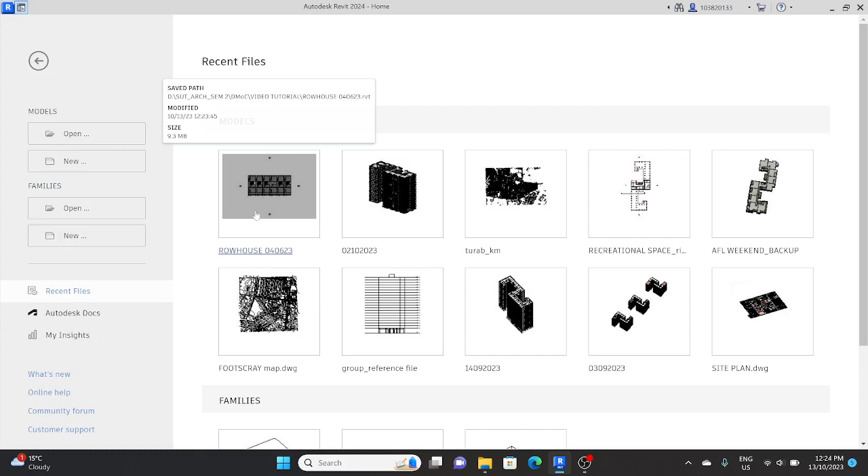To begin with, we need to open Revit and load one of our projects. You can do it here, as I already have this project open. Now in this project we need to go to 3D view, and as you can see, most of our site has already been developed.

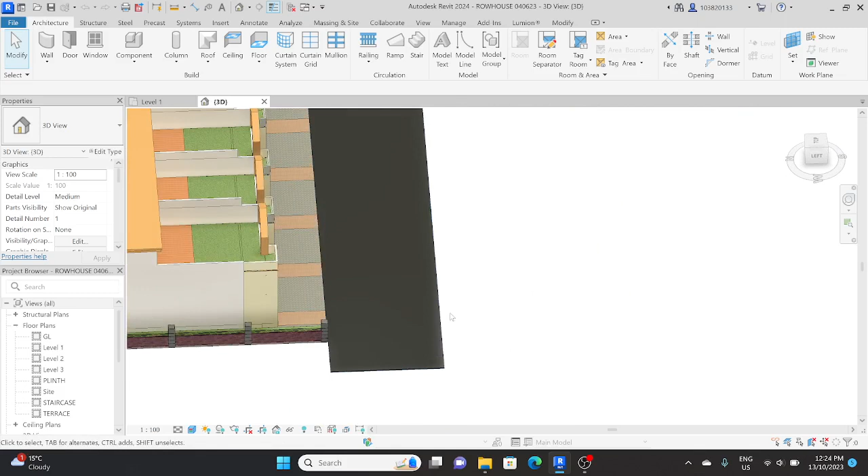Right now, if I want to develop a few more things, for example I need to add a footpath over here, I'll show all the aspects of site development in Revit. So I'll be hiding this element for now.

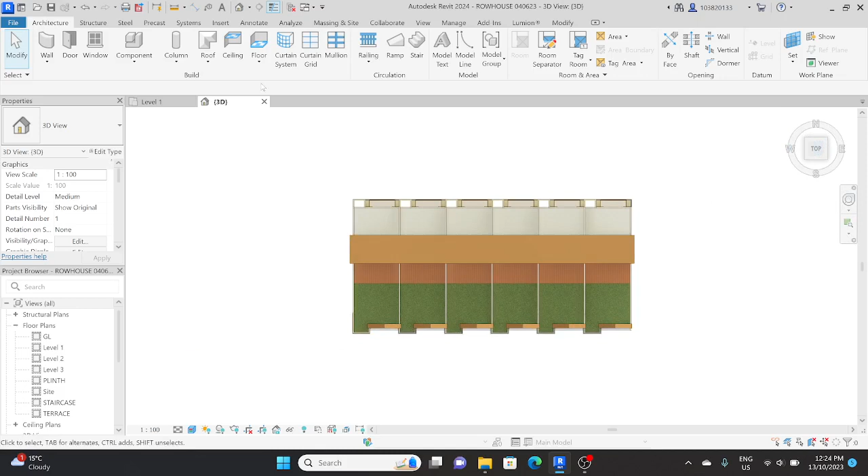To begin with, we will first set our work plane to the ground level, and later in components we would go to model in place.

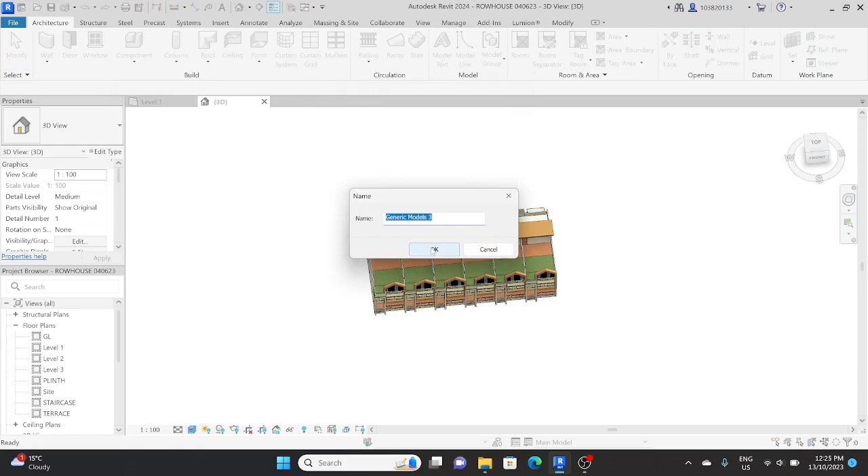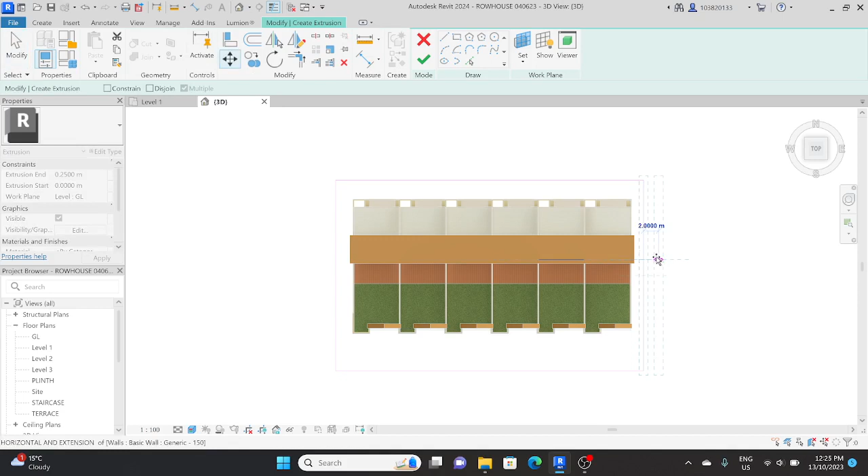There is something called generic mass extrusion, and you can simply make a plane somewhat like this, having it slightly far away from this tentatively. Once we press OK, it will have some depth, so we'll give it a minus 0.10 depth, and as you can see, this sits below the ground floor.

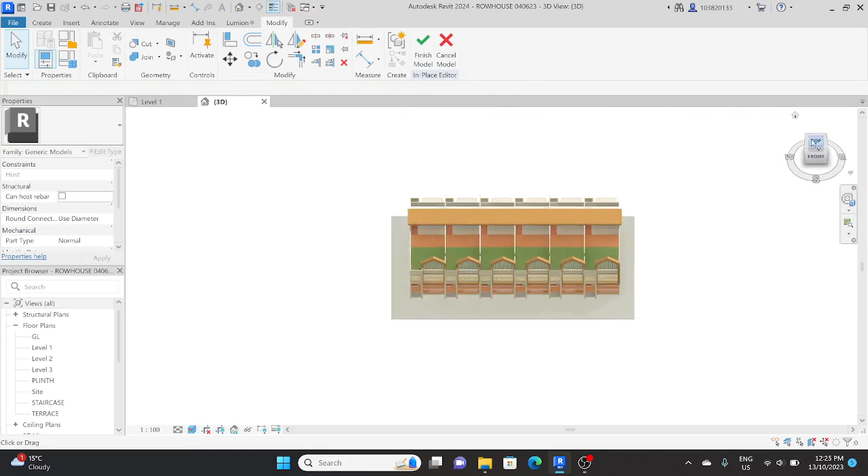Now we'll be assigning a material to this plane. For that, you need to go to material over here, and you can assign your own material, so you need to create one.

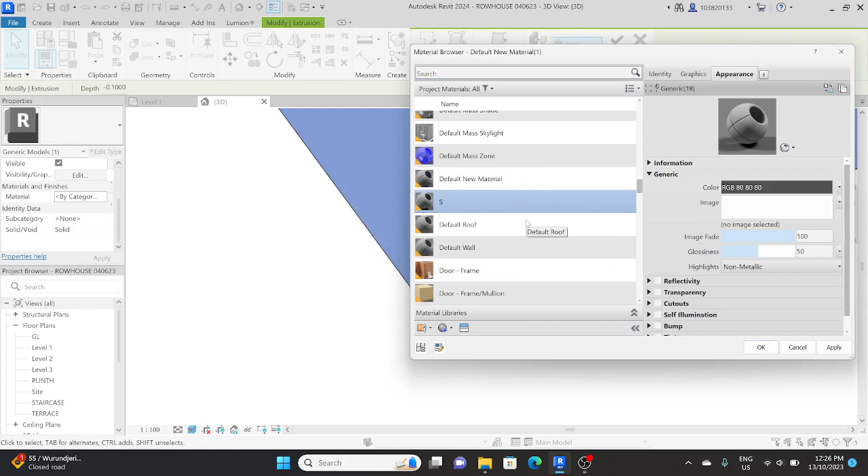I have duplicated my material. I'll rename it, for example with my name's initials, and call it Road Site 1, Site 01.

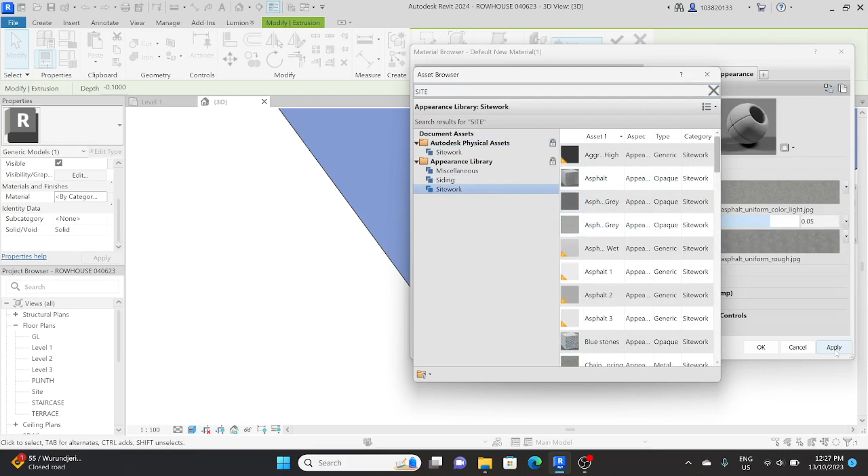I'll go and assign a few materials, like site work. You can assign any of these materials simply by clicking on this icon and applying OK. As you can see, the material has been applied.

Similarly, to create a boundary wall, you can use various tools, similar to how we use tools in SketchUp. There are plenty of tools available; for example, with sweep, you can simply click on the edges of this portion.

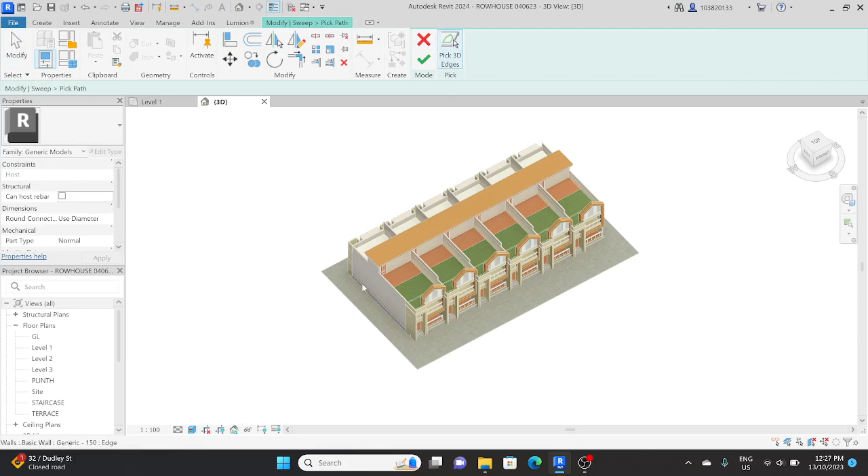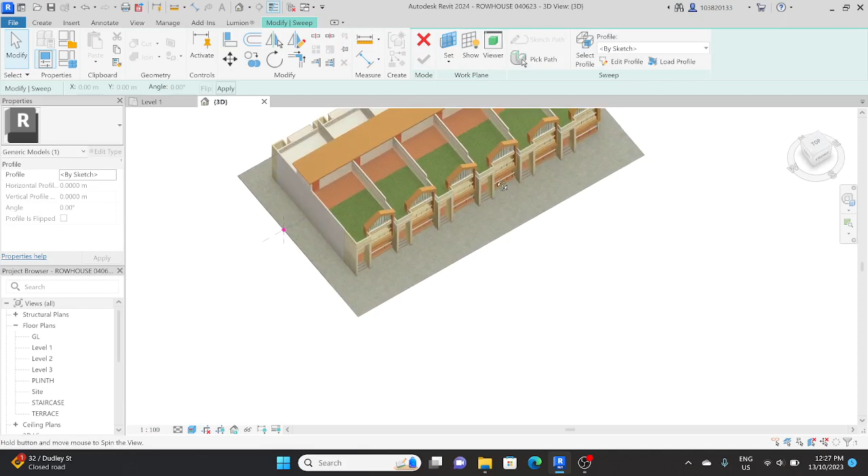You can align these edges over here tentatively, and select OK. By doing this, you get a profile to draw on this plane.

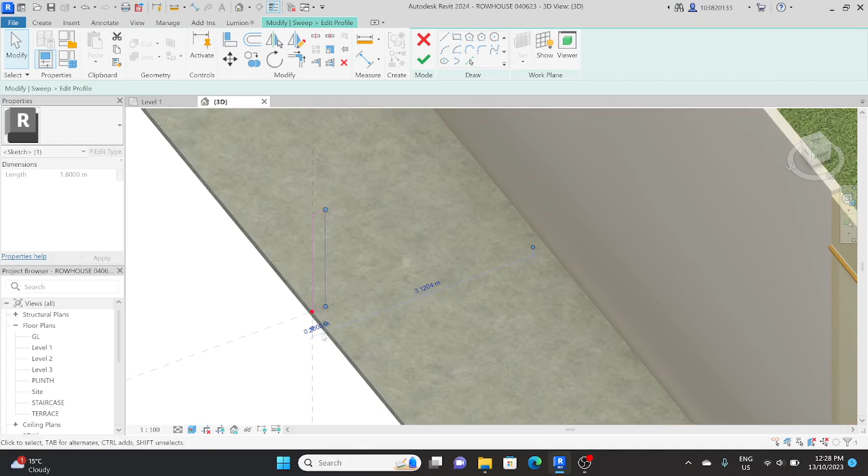Once you draw your profile on this plane, like a boundary wall, it would have a height of roughly 1.80 meters, and thickness of 0.23, which I'll consider. As you can see, my compound wall has been done.

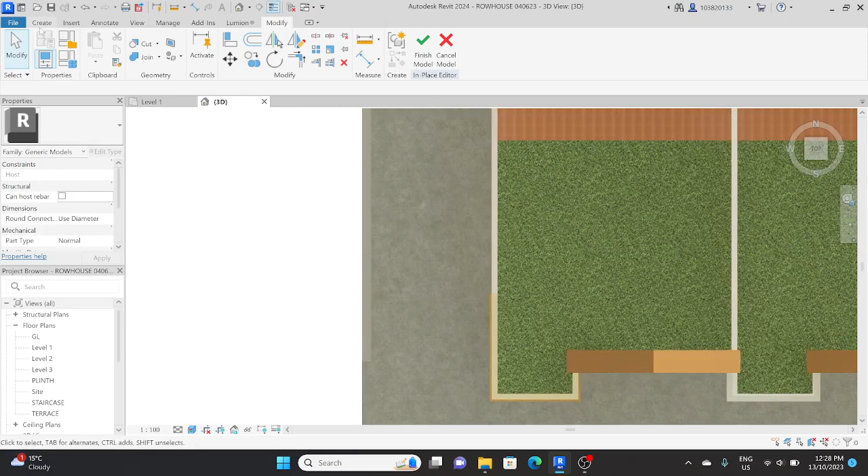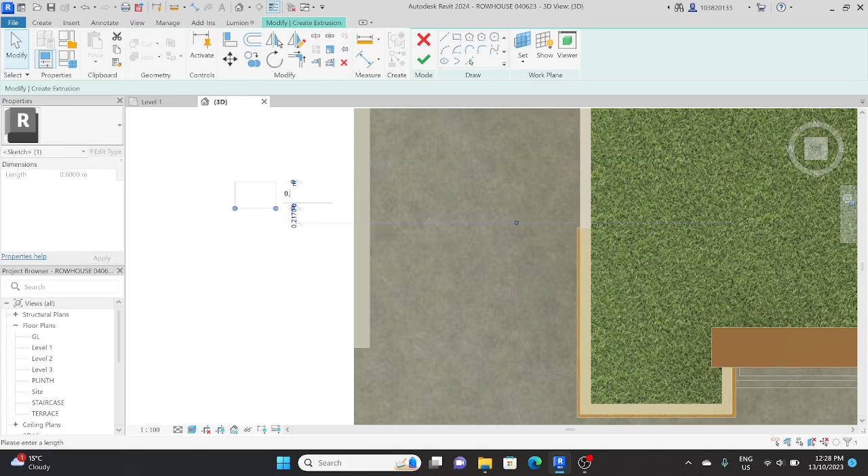Similarly, we can further detail out this compound wall by adding posts. In the form of extrusion, we can add some posts, about 0.6 meters by 0.60 meters, and place them roughly on these edges.

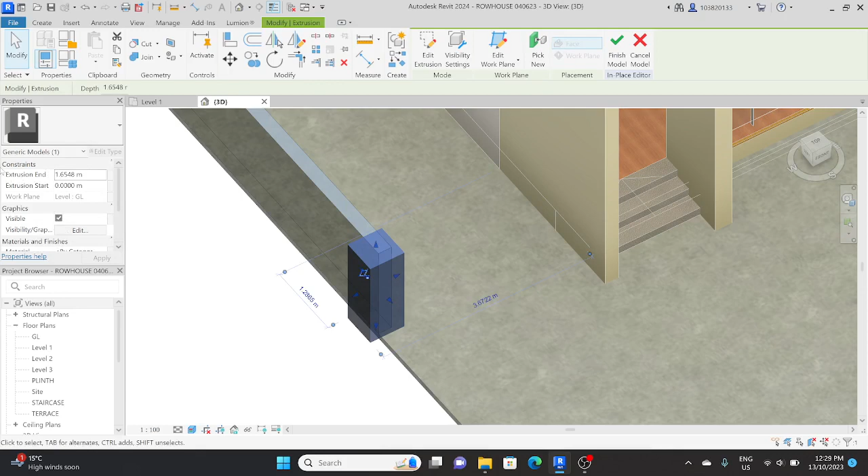Once your posts are ready, you just need to extrude this, or give it a particular height by going on extrusion end, giving it a height of say 2.10 meters. This could be slightly taller.

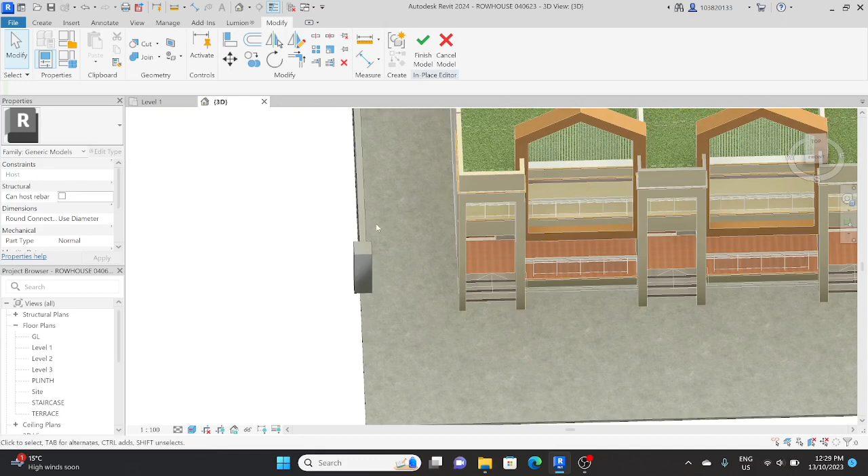Now I'll be further detailing out this post. To do so, I would create another extrusion, set surface, pick a plane, and I'll select this face, the topmost face, and now I can draw a few offsets.

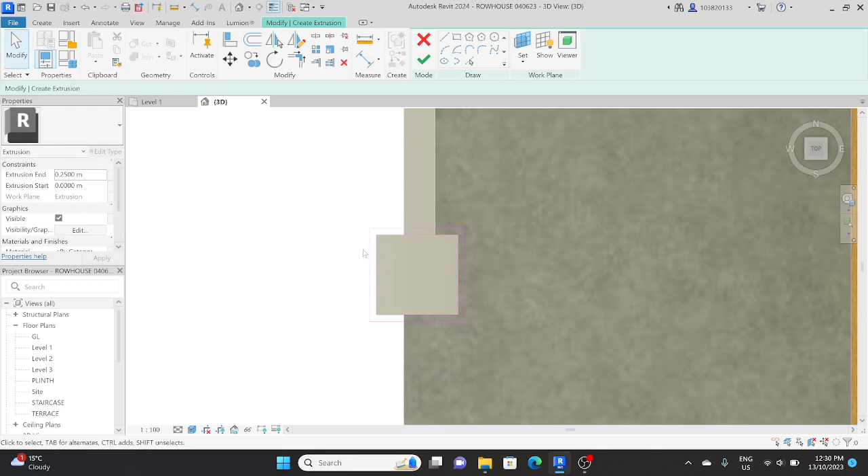We can have an offset of about 0.05, not 1, and simply a layer of it tentatively, so we can have some sort of a design added to that post.

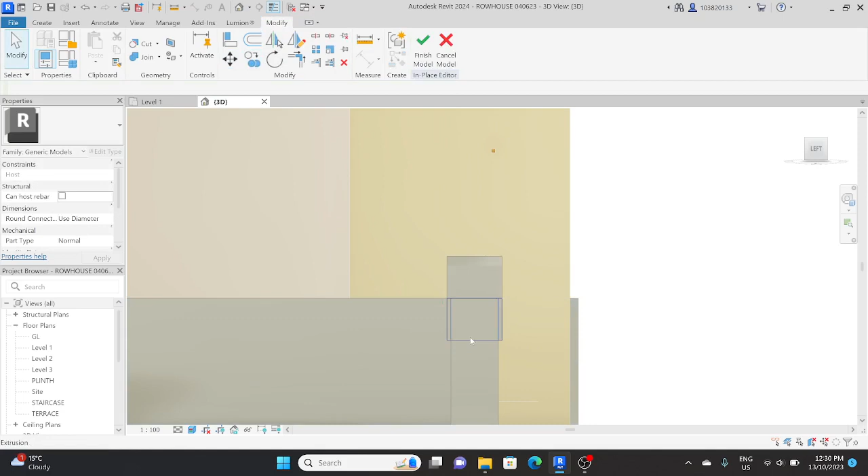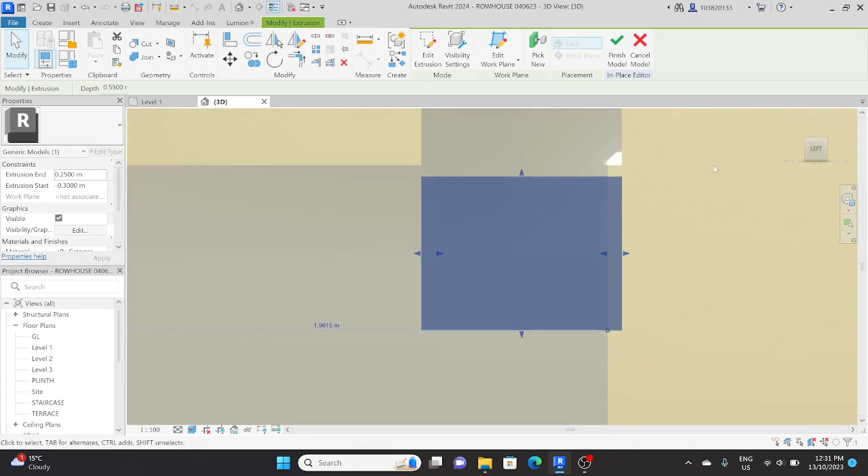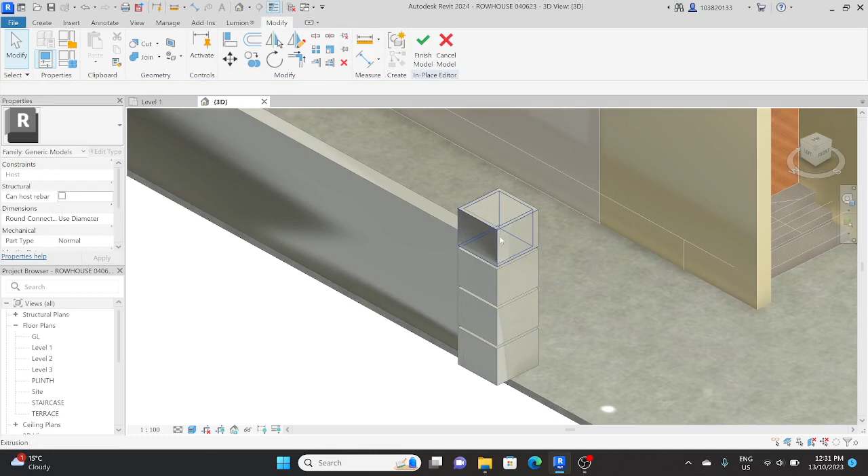So tentatively I've created one post, and I'll be changing the material of the same. I'll take this a bit up, and now put some dark color, for example.

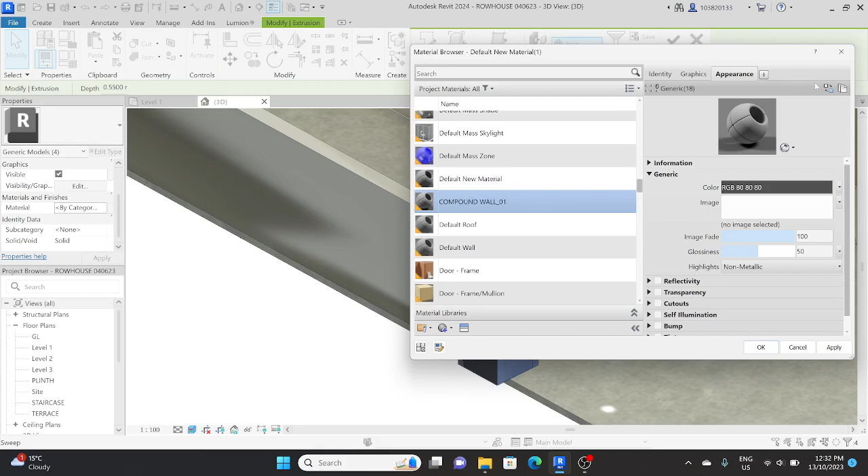I'll again go to create new material, rename it Compound Wall 01. In this I'll just give the cladding some marble. You can pick any material, since in Lumion it's going to change anyway.

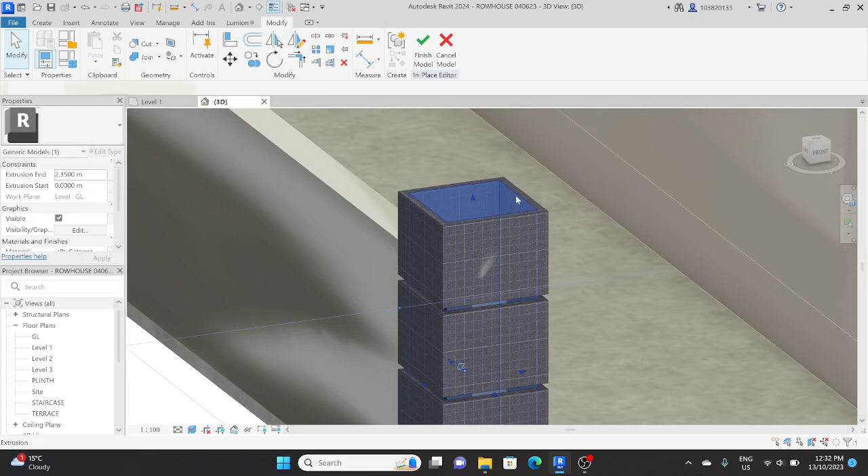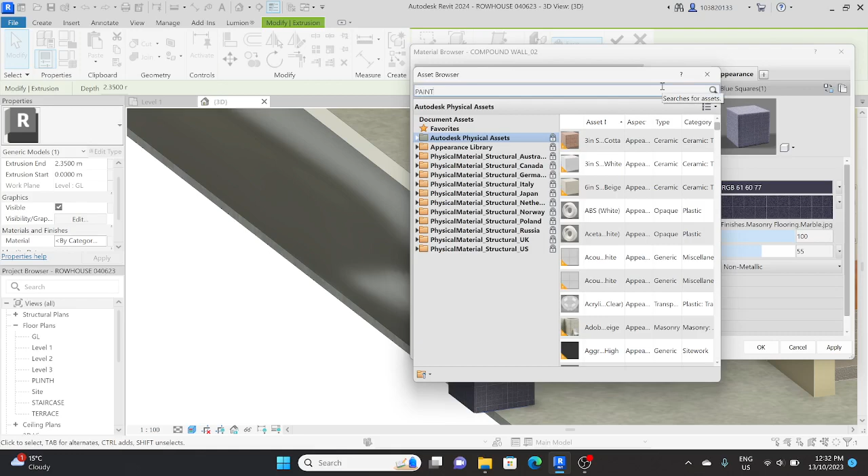This looks something like that, and for the inner material, I can simply click duplicate material and give it number 2, saying this would be in appearance. You can go over here and click on some paint, so the wall paint can be beige. As you can see, the material has been applied.

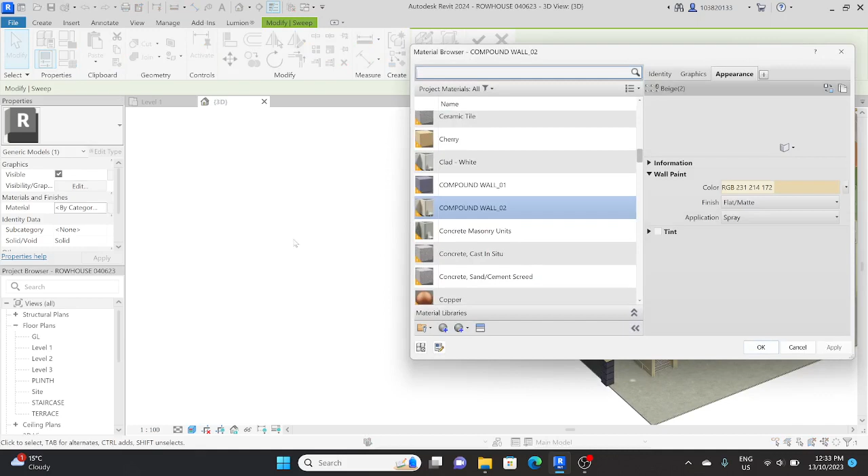Similarly, for this compound wall, we can assign one color, a separate color. Again you need to go over here, duplicate, and rename this as 3, and you can simply assign one random color to it.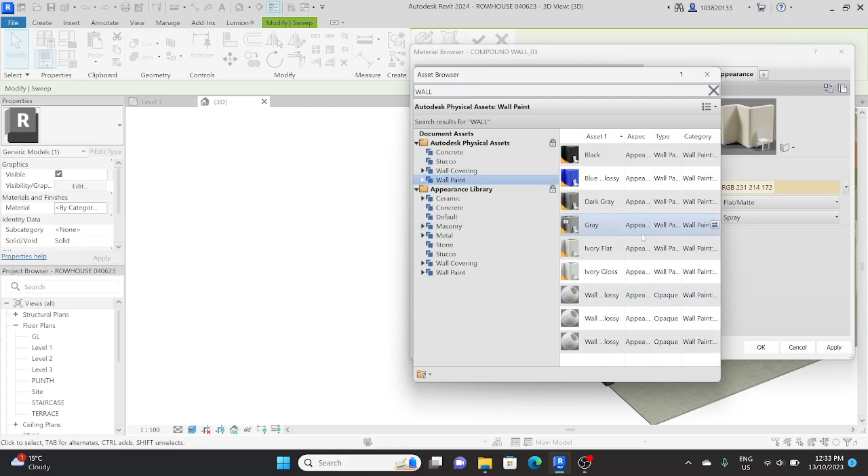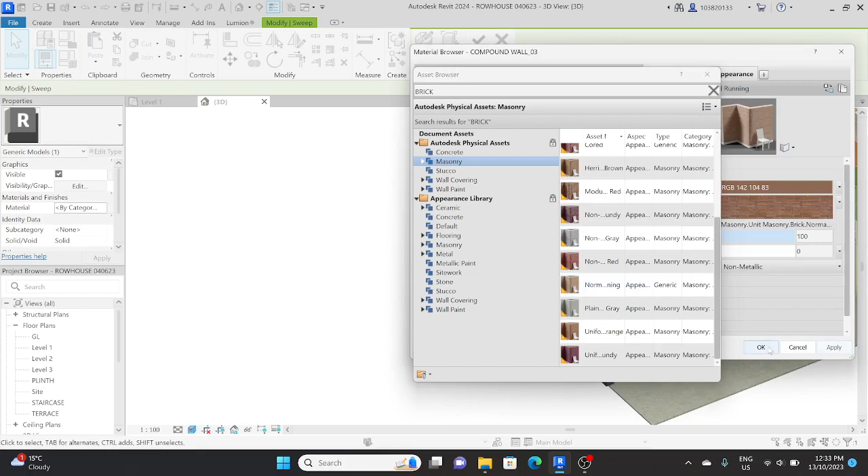For the wall paint, you can go for something like brick masonry. Here is one of the materials that I can assign, and as you can see, the material has been applied over here.

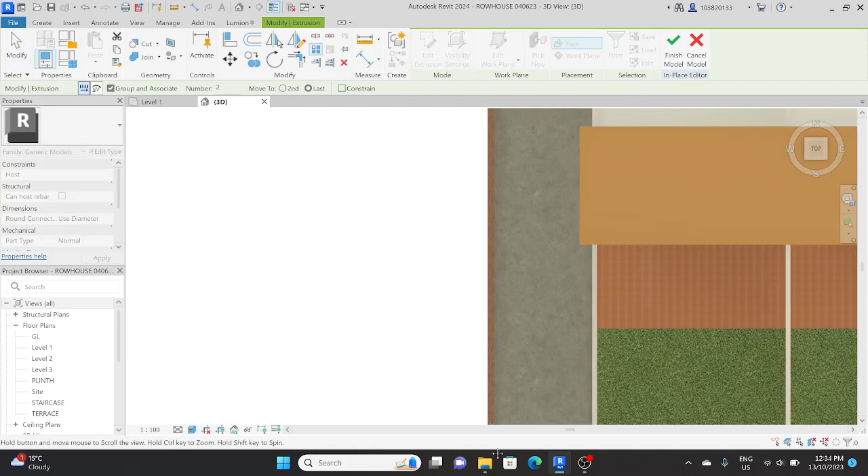Now we're going to put this post at several intervals. For that, we just need to go into the command box, array, select last item, and set it to the desired position. Now you can change the counts of this thing so it will be placed equidistantly. I'm placing 5 posts over here.

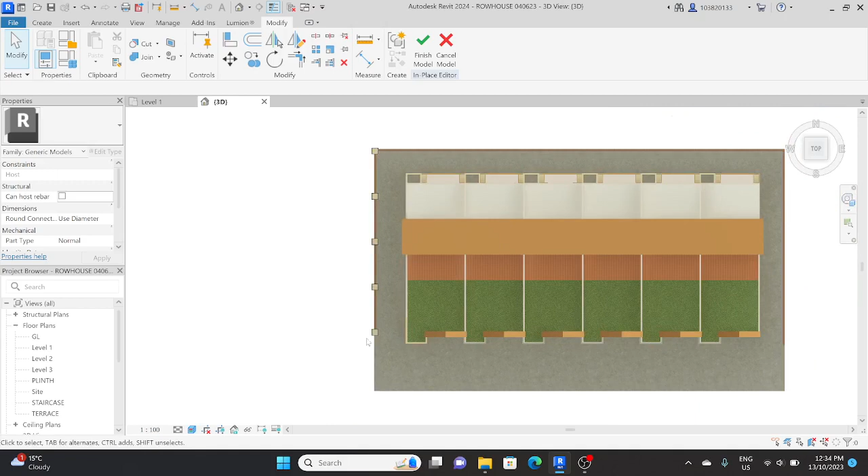Similarly, I can take this post and mirror it through this option. There's an option called mirror, and I'll make a copy of it and simply put it over here.

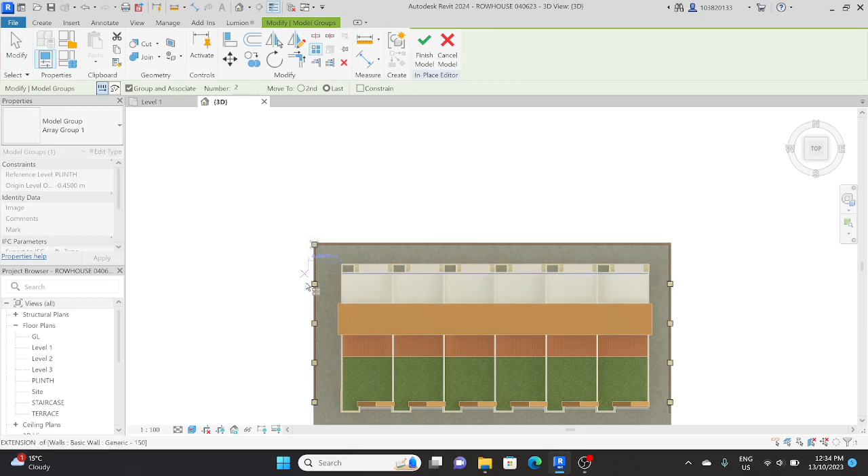Now I'll delete this one item and make another array of this item, select last, give it a reference to this point, and it will ask me for the number. I'll put 10 posts, so this seems fairly equidistant.

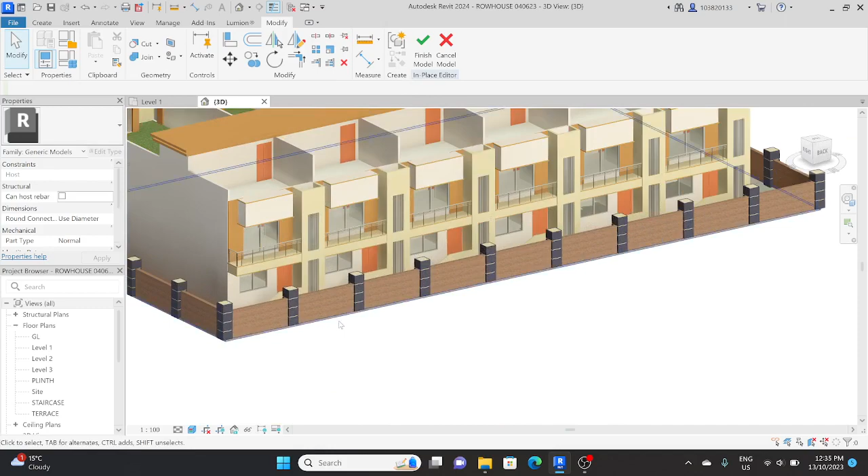So likewise, my compound wall is ready.

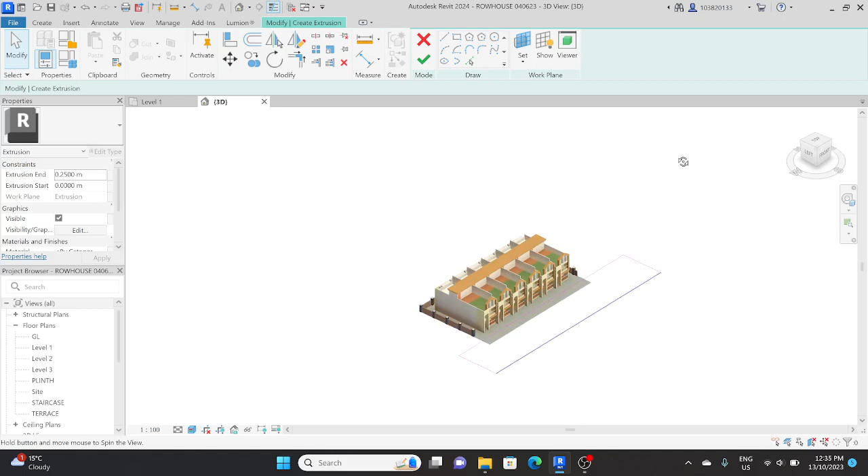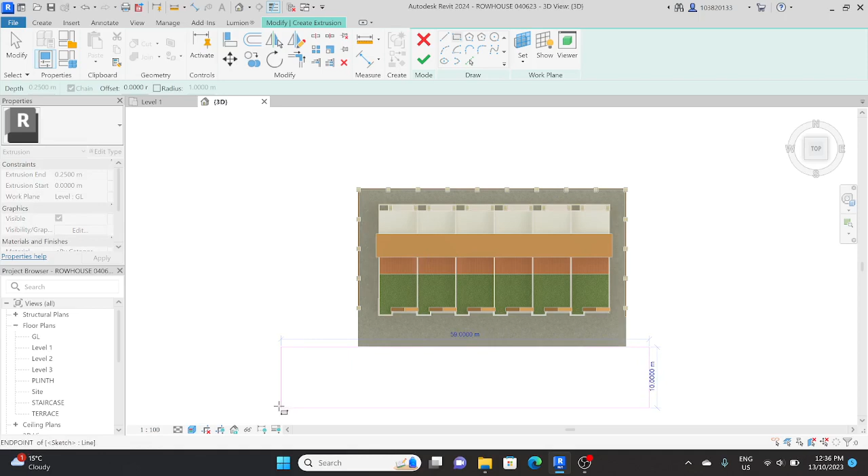Now further we need to develop a road. So for road, again we need to go to extrusion, and in extrusion we need to draw a rectangle face. As you can see, my work plane was set to this point, so I need to get it on the ground. So to do that, I need to set the plane before drawing any item. Set plane, pick plane, I'll select ground, and again I'll redraw this. I'll just align this gap.

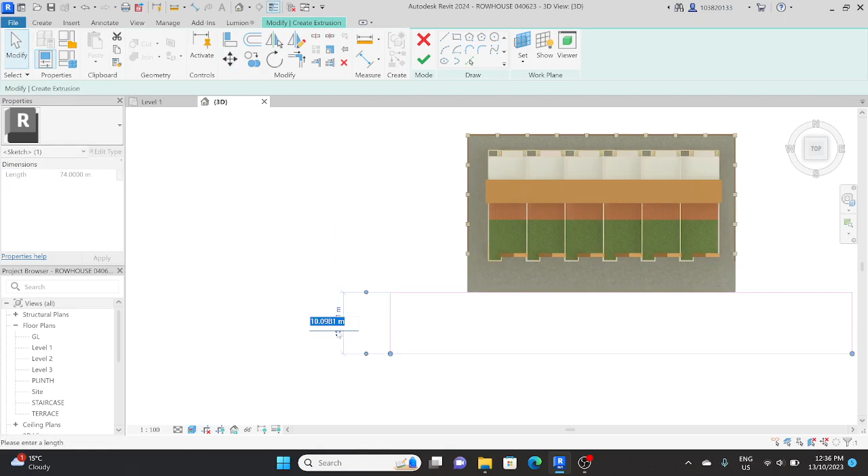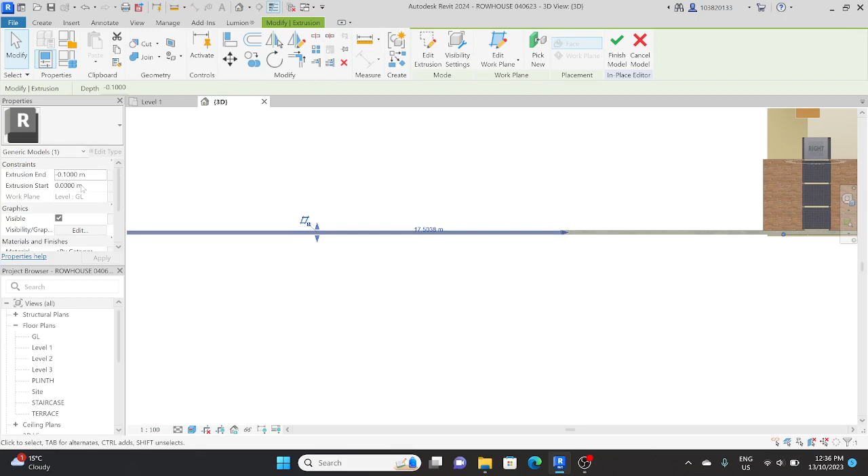So as you can see, I have simply made the road a random road, say about 10 meter, and now I'll select OK. So in this thing I'll just give a width, depth to my road, so it will be minus 0.10 for example, and I want it to be below this, so I'll disassociate and I'll just simply move the plane below.

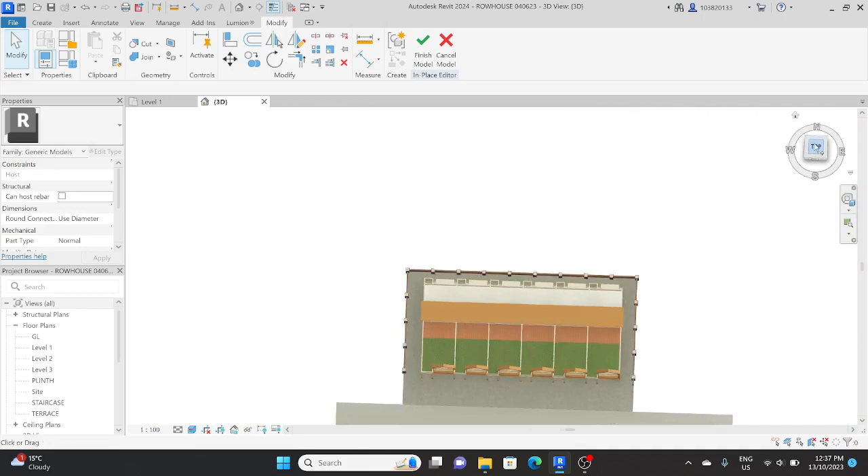Now I need to give some one side. I want a garden area on this portion, periphery of my building. I want a green buffer zone on the periphery of the building, as this would have a back entrance. So I'll be keeping this area as completely green.

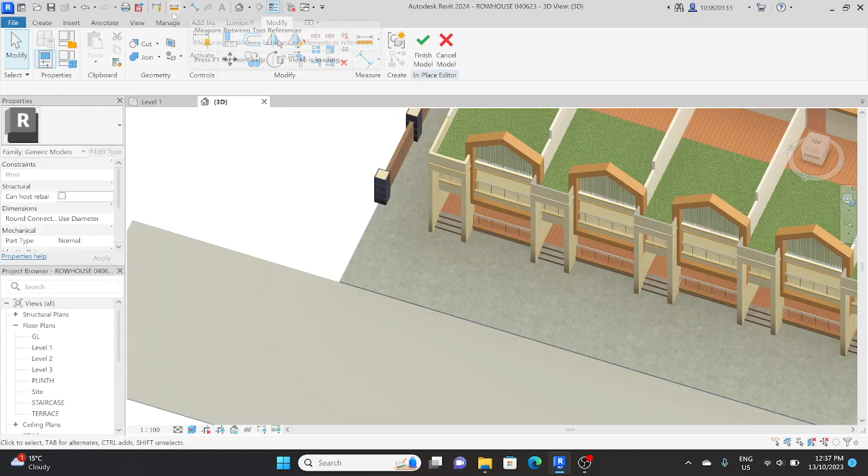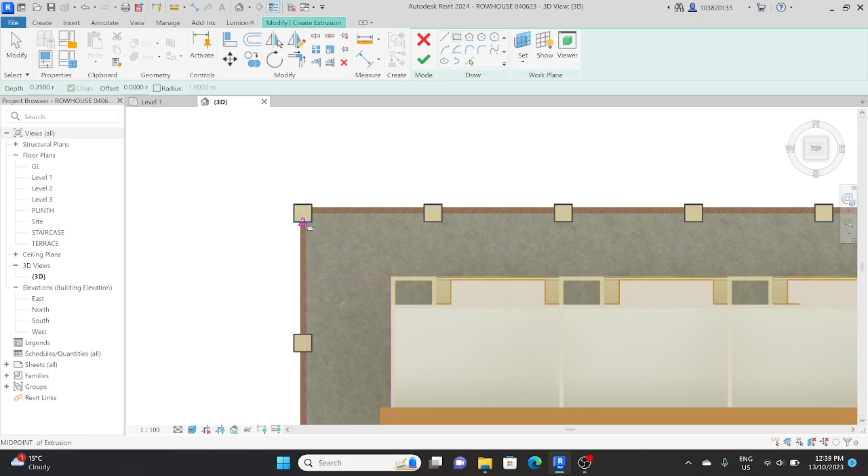So to do that, I need to simply once again create, and I'll just skip this video further, and show you the developed complete form which is ready to export. As you can see, I've been making a grass area over here through the generic tools.

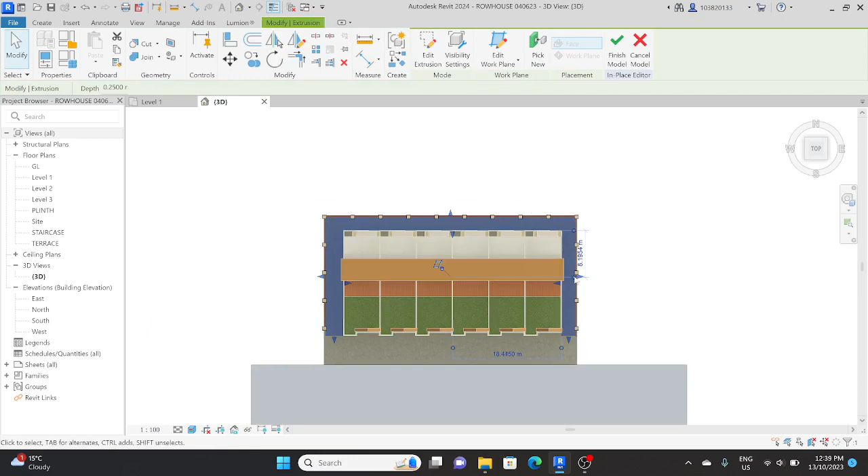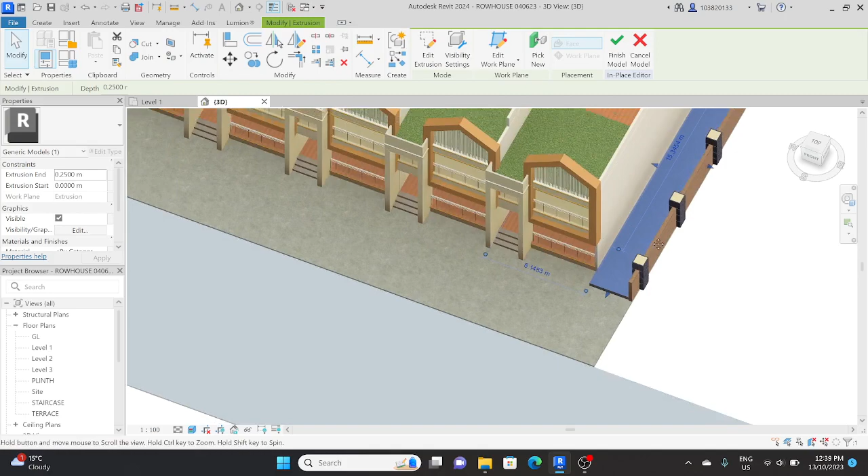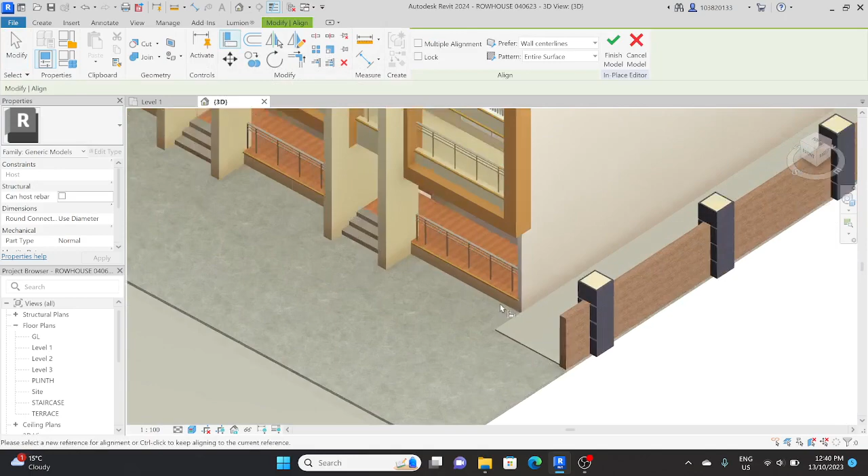Here I'll just give it a small depth. In the properties bar we can further just give it a small thickness to it, so say about 0.25, and as you can see there is some sort of thickness to it, and we can just align this over here, aligning it with over here, and we can assign this material as grass.

So I already have one material ready with me. As you can see the material has been assigned.

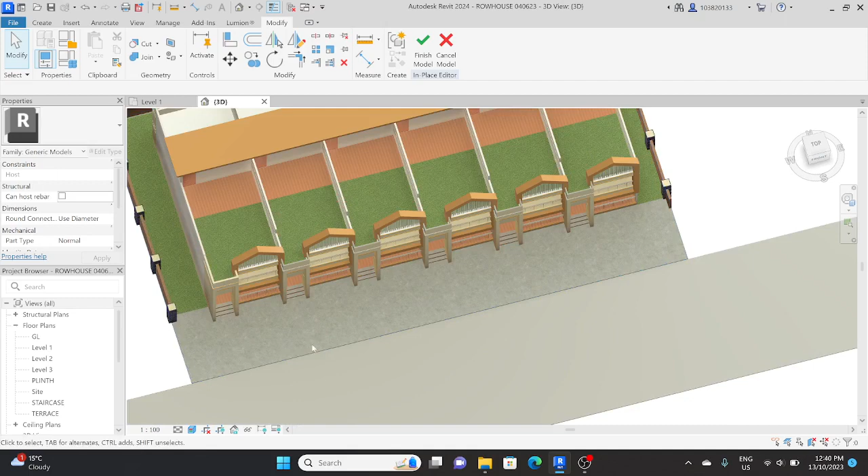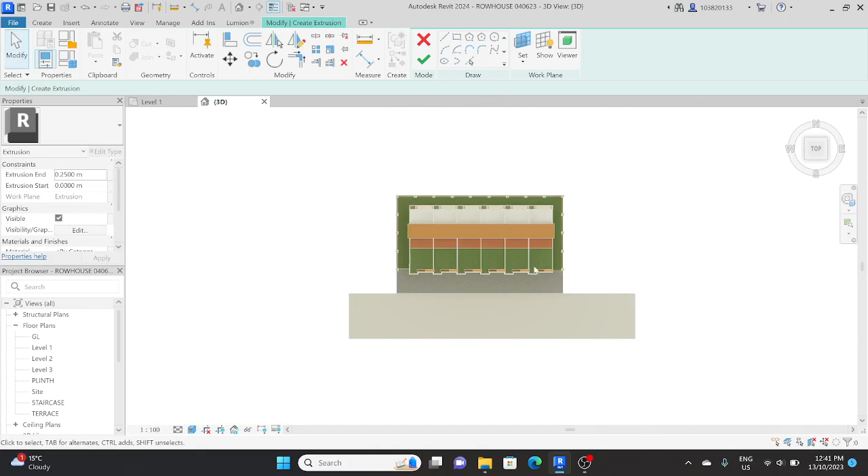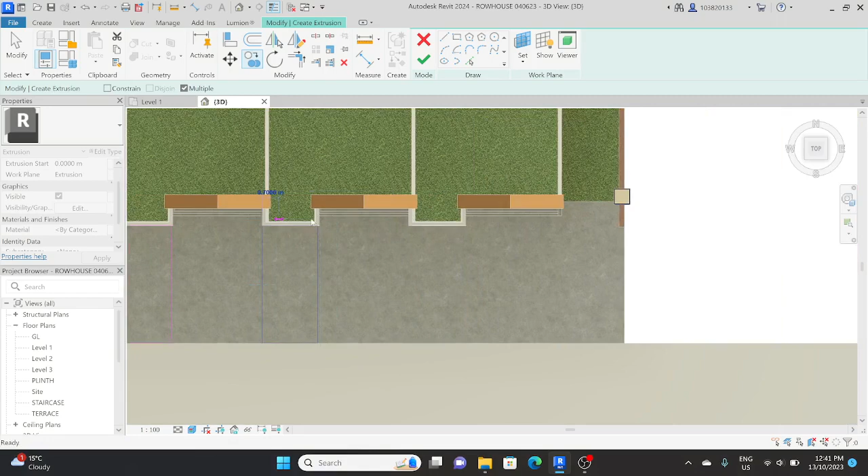Now I'll just make a few driveways over here. So to create a driveway, again I'll be selecting this, set mask, and I'll make one. So I'll just copy this to the remaining, and select OK. Once I select OK, I'll just give it a small depth thickness just to assign the material.

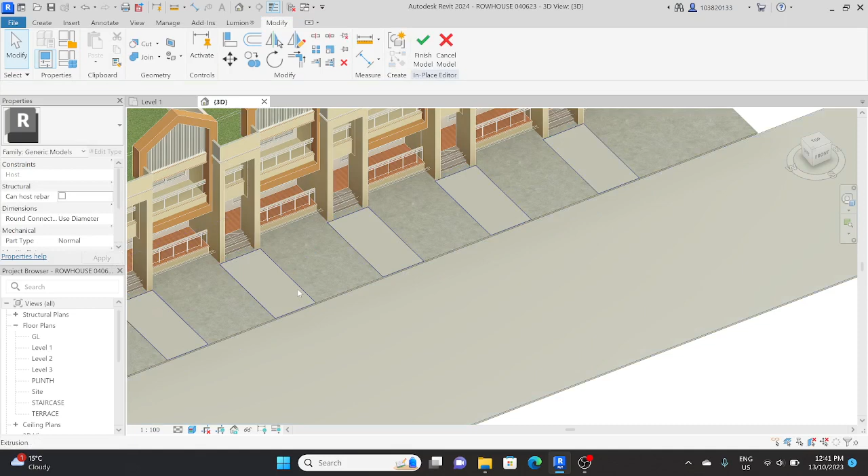Which could be 0.001, so that it differentiates my path. And I can go to ground level, so I can just simply align this point till my staircase, roughly.

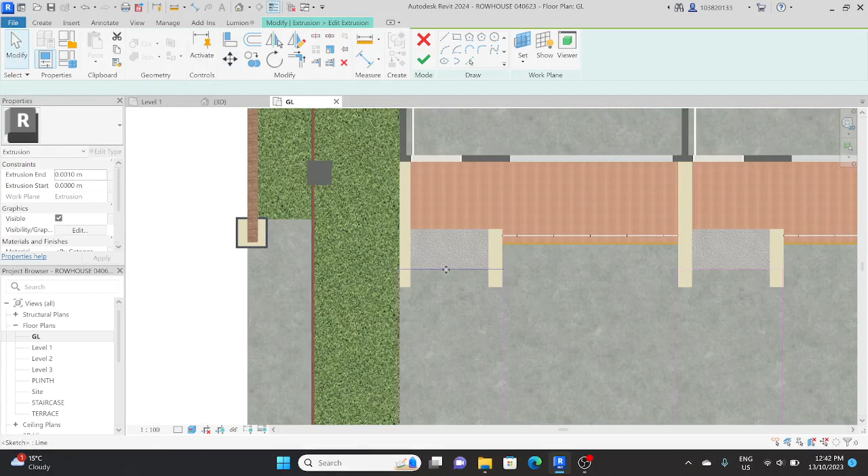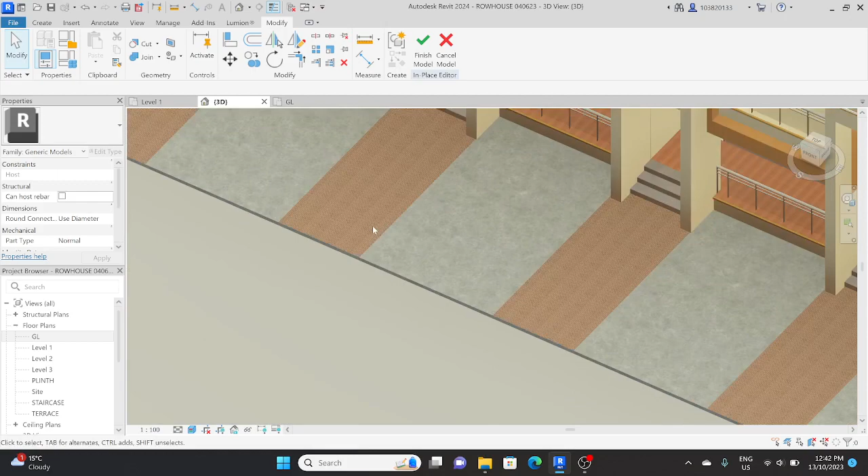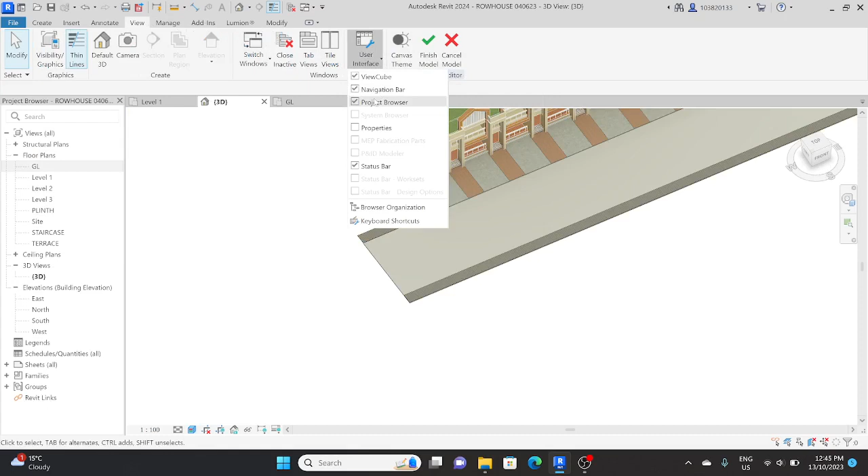And yep, so now I believe I have tried to cover up most of the things. I can add a footpath over here also, so I'll add and skip the video further. As you can see, I have already added a footpath to my existing path road, which merged with this driveway. It's sort of made through extrusion only.

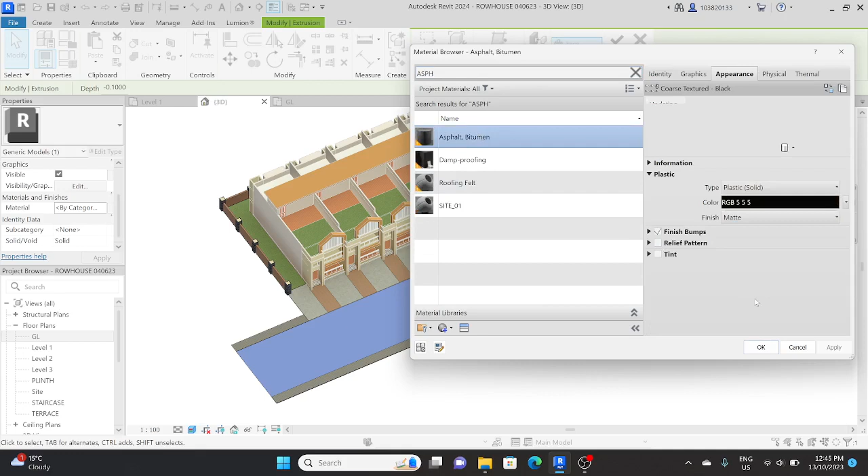And further we will be just assigning one material for the road, which can be asphalt, asphalt bitumen. So this makes our road. That's a basic site development in Revit.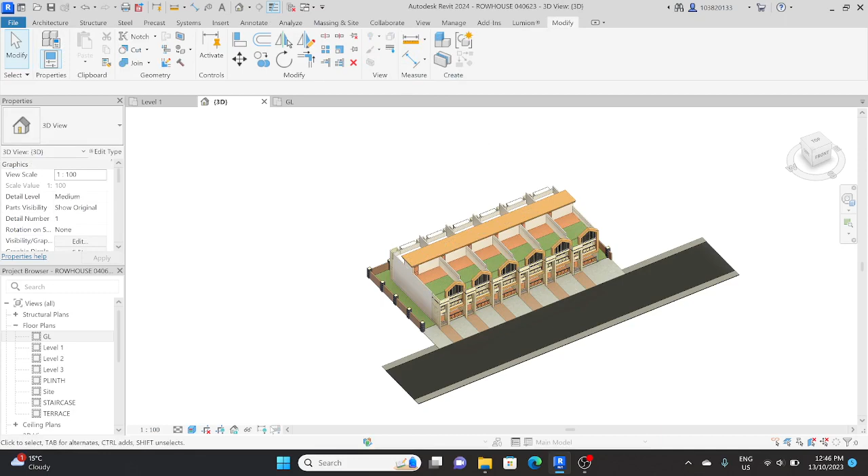So now further we need to take this entire model into Lumion with all the assigned materials. To do that, we need to have one bridge connector. I'll just delete my previous thing.

To convert a Revit file into Lumion, there is a need of a bridge connector. So in Google, we can search for Revit to Lumion bridge connector, bridge free download. It's available on the official website. You just simply need to download this plugin in Revit. Over here you can simply download this plugin for Revit, any of the latest version, and I already have it in my PC.

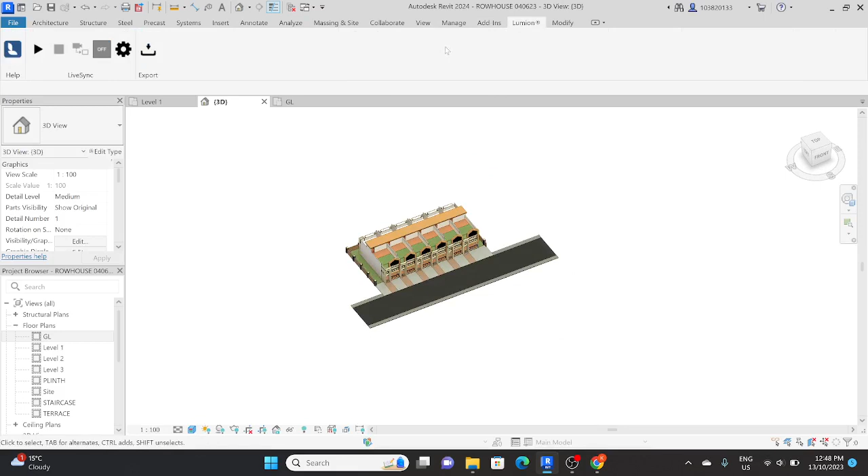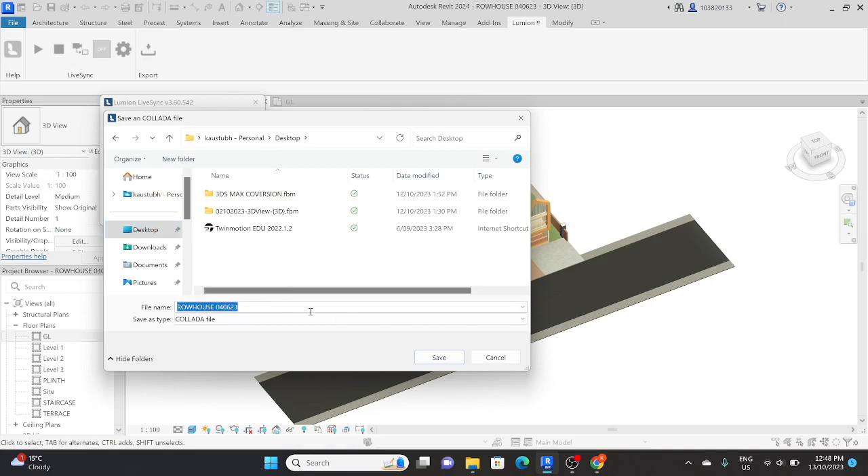So in software, the setup would look like this, this is the file. You just need to install this file, and simply reopen your Revit once again. So you would see a Lumion tab over here which appears, and in this Lumion tab you just simply need to export, and your file needs to be exported as a Collada file. So here I'm trying to export it, I'll just place this file on my desktop. So it says row house, save.

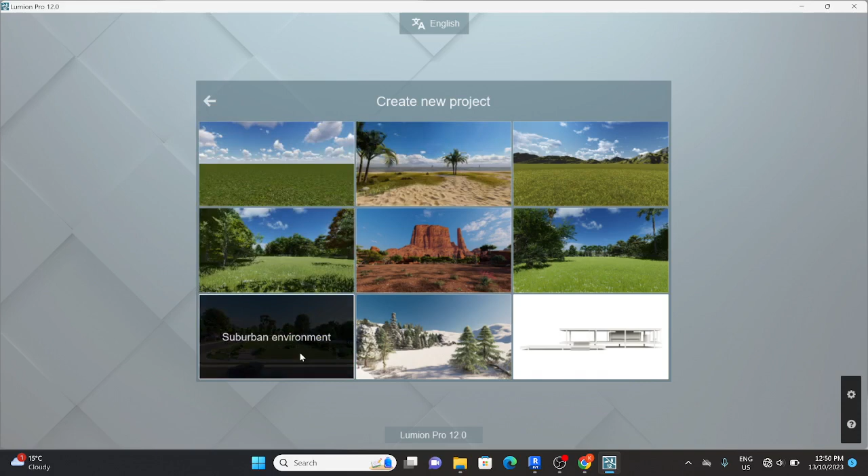So now you need to open your Lumion. I'll just disable this thing and I'll be opening my Lumion. So once your Lumion is open, you need to create a new project and choose any of the environment. So for example, I would choose this suburban environment, which suits this pretty much.

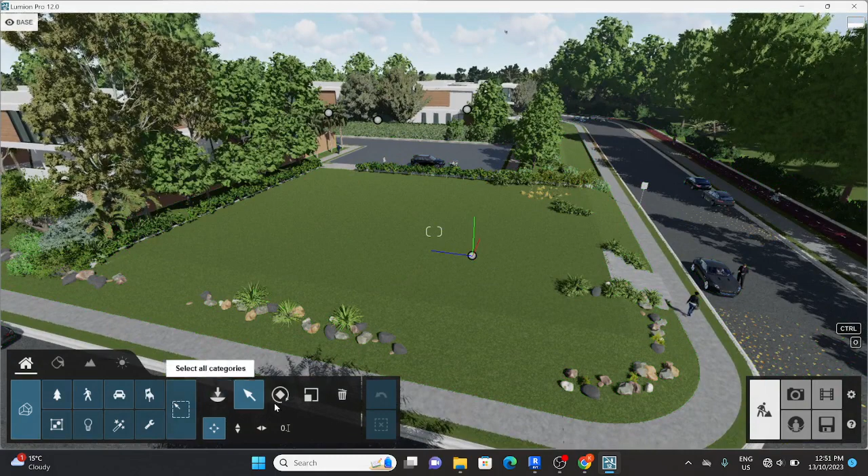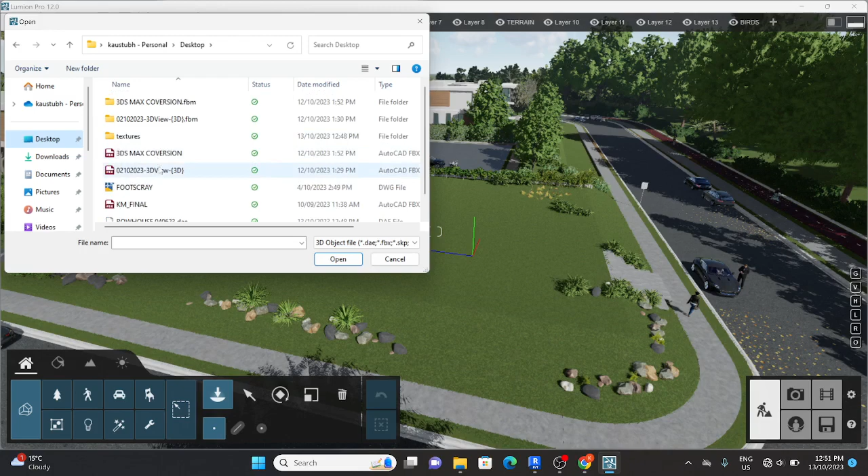So my Lumion is open right now at the moment, and I can place my file over here, somewhere over here. So for doing that, I need to go into content library, imported models, and place object, and I'll create a new import file which I have saved on my desktop. So to do that, I'll select this file which was there, and it will load into my Lumion.

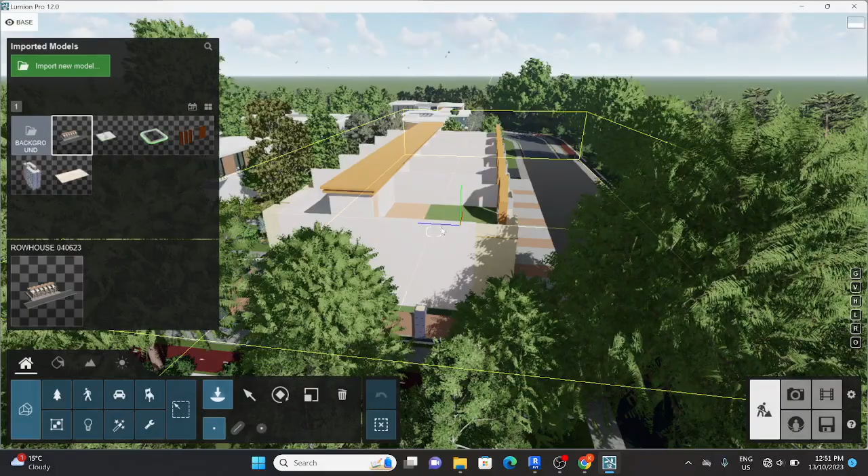Okay, so this is going haywire. I simply need to place it somewhere, and I'll press escape. So that's how you bring your file. As you can see, my file has come, but I need to change the context. This file comes with whatever material that I have assigned. It comes with all the material, and later I can just select this material. I'll be discussing in the further tutorial how to change and apply material.